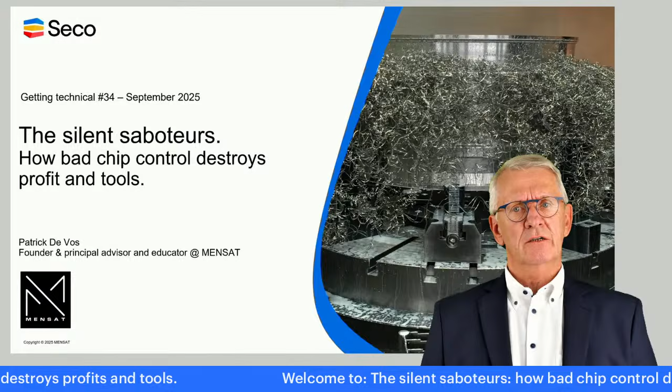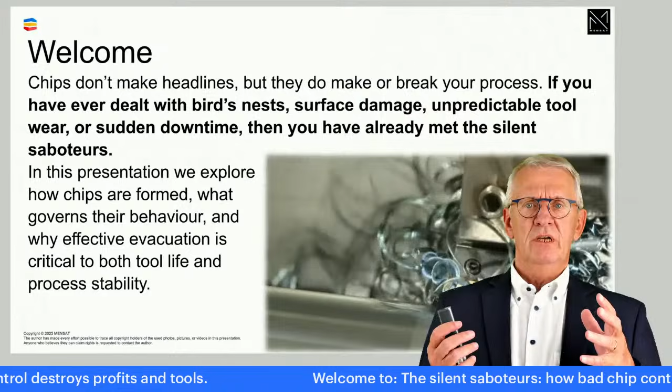Hello everybody, welcome to this session where we are going to talk about chips. People working in machining applications are well aware of chips—it's one of the things created during a machining process. Most of the time, when you use the word chips, everybody starts thinking of a situation like the one you see here on the video. In other words, chips equal problems.

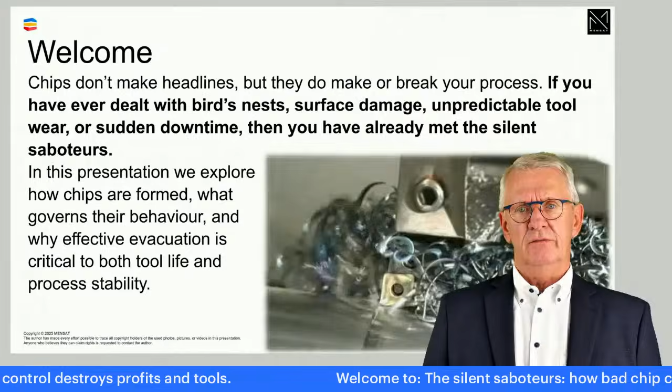That's in general how people see the aspect of chips in machining. In this presentation, I'm going to try to let you understand the other side of a chip. Sometimes I say chips mean trouble—for the careless, those who do not know. But for those who fully know what a chip is, a chip is a treasure, a treasure with which you can do a lot.

My name is Patrick de Vos, I'm your host today. I have more than 40 years in machining, so I've collected quite a big amount of insights. Over the years, I kind of created my own model or concept, one could say, about the machining process.

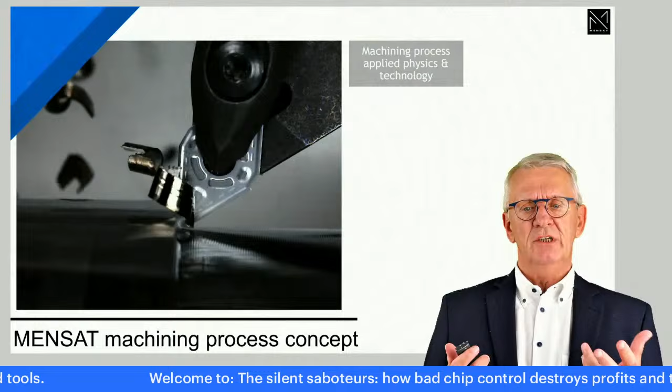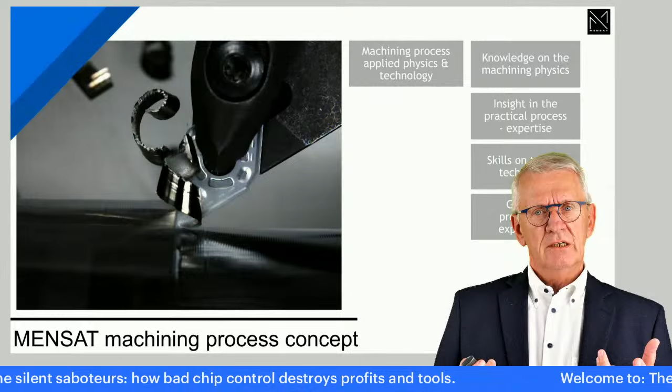One part of that concept is that understanding a machining process for me means you need a collection of knowledge on the physics side of machining—what's going on there, cutting forces, heat, temperature, all of that. You also have to have insight into the practical side, what we call expertise. Expertise, as I see it, is: okay, I understand now what's going on, and I use that knowledge to influence the process. That for me is expertise.

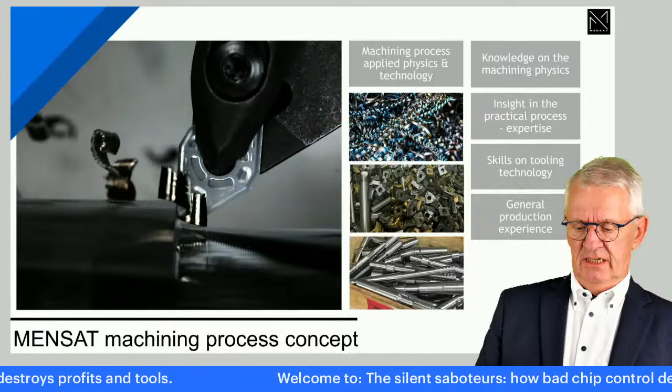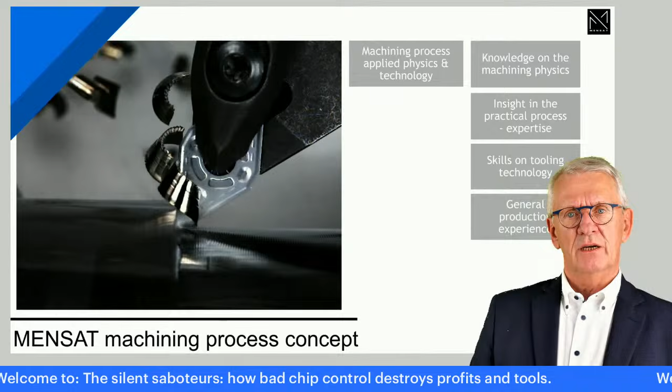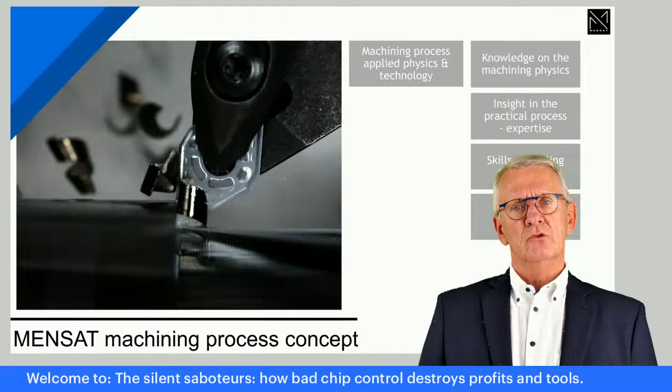You also need skills, and skills are about making it happen. You have the knowledge, you have the insight, you know what to do, and then you're capable of doing it—how do I manipulate all the elements in a machining process. And experience in production, because machining in the industry is more than a technique, more than a process. Machining is something people in industry use to create workpieces for an economical purpose, to sell them, to make profit out of them. That is also part of machining in my eyes.

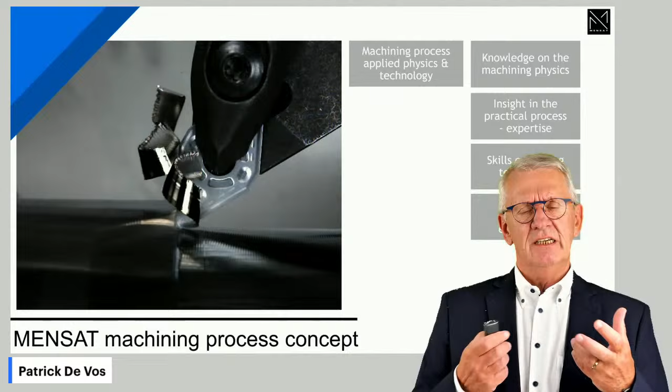But even if you possess all this knowledge, skill and insight, we notice that machining means chips are generated, used tools are generated, and every single chip which is formed is different, and every used cutting edge looks different. If you think about it, if you have a process and everything is fixed, why isn't every chip the same? Why isn't every used cutting edge the same?

And the third part, which is a reality, is that some of the parts we produce are no good. So you have a process, you establish all the process parameters, you make a workpiece—one is good, the next one is not good. That leads me to the conclusion that in machining today there's quite a lot of chaos. Chaos, as I define it: I have a number of parameters which I do not change, I make them work together, I look at the output, and the output is not constant, it's modified. This means there are things we forget, overlook, or wrongly estimate.

And the one we are going to talk about today is the chips.

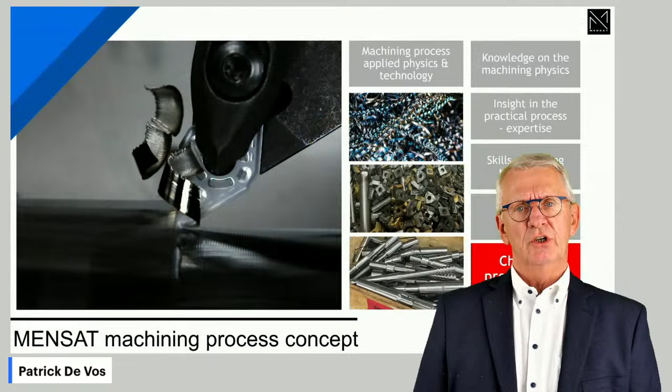Some of you have perhaps heard me talking about something I call GTDA, a methodology, a concept to analyze used tools. GTDA stands for Global Tool Deterioration Analysis, a method that gives insight into the practical machining process—not part by part, but the total picture, the total workshop, one could say.

Based on that insight, I can appreciate the actual machining process—to which level I have it under control, and where I need to optimize, improve, or correct. But GTDA has a disadvantage: it's measuring offline. It's measuring how a tool looks after the process, meaning whatever we see, whatever we learn from it, is late for the process which just finished.

That's not a big problem if you talk about big batches, where you produce thousands, tens of thousands, perhaps even hundreds of thousands of workpieces—what you learn from the first one, you can apply to all the others. But if you talk about small batch production, where perhaps you produce only one workpiece, you learn after that one workpiece why it was not good, but it's kind of too late. The other thing, which is what we are going to talk about today, is that you can analyze the chips.

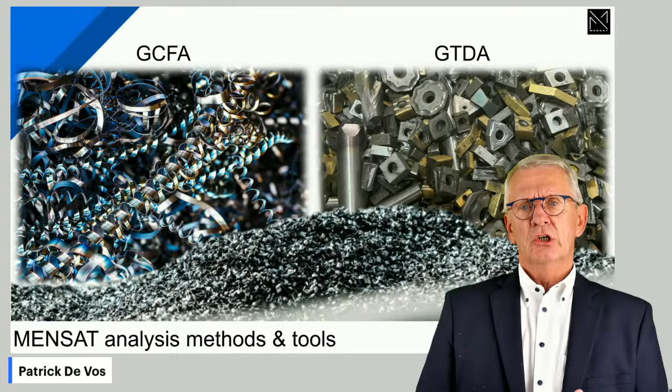A chip, next to problems and issues, is also kind of a signal to us, if you know how to pick it up - a signal online, in process, that tells you how the process is going. So in process, you can correct if needed, depending on what the chip is telling you.

All of these aspects on chip formation - I would like to refer to them, because we have only one hour today, we can't discuss everything. Although, if you have questions, please put them in the comments. At the end we have a question and answer session. I'd also like to point out that there are pocket guides available, and one of them is dedicated to chip formation - 80 pages of knowledge about chips, where you can find a lot more.

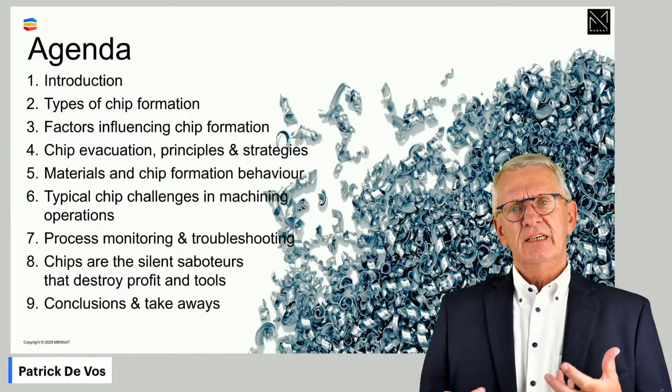The agenda for today: the time is limited again, so I want to talk a little bit about chip formation - how is a chip formed, and what are the different types of chips? I also want to talk about chip evacuation, because it's not only enough to control how a chip is formed, we also have to be in charge of how the chip evacuates away from the process, because a lot of issues can happen there too. We'll discuss elements influencing chip formation and chip evacuation. And the last part I want to talk about is the GCFA system - how do I monitor chip formation in process, and how do I act and react with all that?

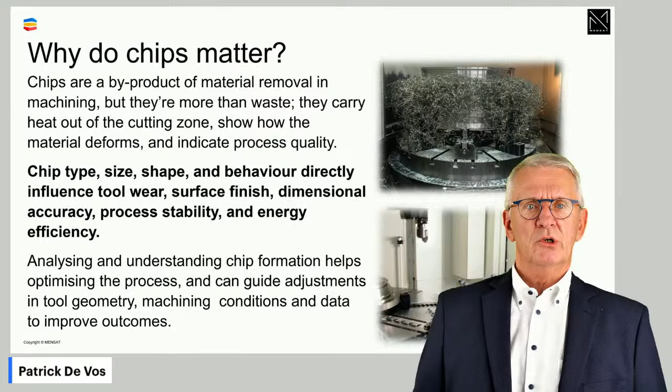If we talk about chips, what we need to discuss is the type of chip - is it a long chip, a short chip, whatever. The size, as I already said, how big is it. The shape it has, and how is the behavior of the chip. Because these things are going to influence how tools wear out, the surface finish on a workpiece, dimensional accuracy, process stability, and so on and so forth.

And if we evaluate chips, instantly we talk about good and bad. What is a good chip? What is a bad chip? In defining that, normally people look at technological aspects. They talk about a good chip making the process smooth and reliable, having a good heat balance, tool life well under control, and a number of other technical things people use to look at the chip and say, okay, this is good, this is not so good.

But next to that - because as I already said, machining is more than just a production process, in industry it's also a process we use to generate profit - there are economical and sustainability targets also. And if I take those two and look at a chip, a good chip should also not create hidden costs. What do I call a hidden cost? If a chip is too long and wraps around the workpiece, and the operator has to stop the machine and remove the chip manually, that creates a hidden cost - because everybody thought the machine was running, but actually it was not, because the operator had to remove the chip.

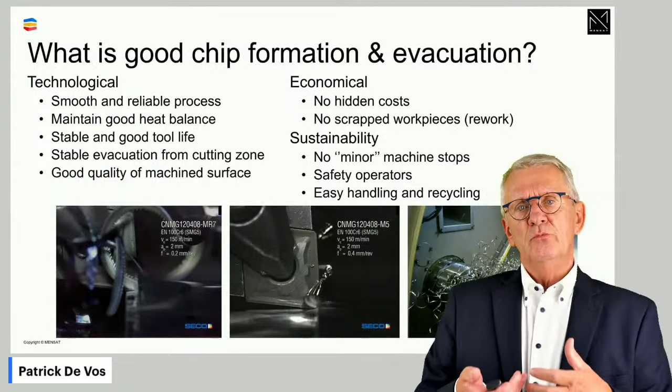Scrapped workpieces can have a hidden cost, and workpieces can be scrapped or at least need rework due to chip formation issues, chips that scratch the surface or something like that. And from a sustainability perspective, there should be no minor machine stops due to chip formation, because that's going to endanger the flow of the process and the safety of operators, since bad chips are not so nice for operators. But also from a recyclability perspective, chips should be easy to recycle and easy to be handled. So the definition of a good chip goes beyond pure technical stuff.

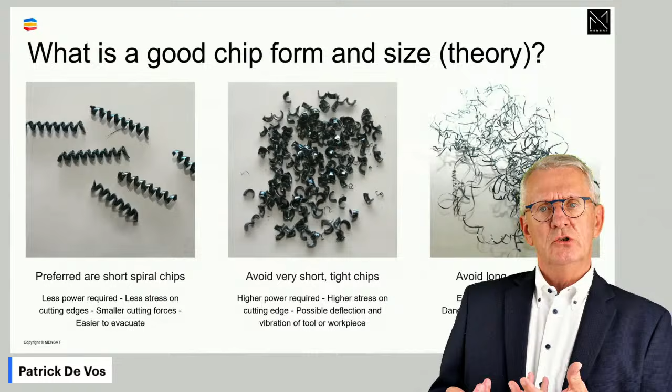If we look at chips in reality, in a workshop, normally we say the chips to the left, the spiral-shaped chips, are the good ones. They combine quite a lot of advantages and have very little disadvantages. Compared to that, chips can be too short or too long. Too short chips are mostly dangerous for the process because you'll suffer micro vibrations, which could lead to premature end of tool life. So too short chips is more a process-related thing. Too long chips is more a chip evacuation thing. The chips themselves are nicely formed, but it's an issue taking them away from the process.

Compared to that, chips can be too short — the so-called overbroken chips — which is dangerous for the process. Chips can be too long, whatever shape, and that is more a chip evacuation issue we have to handle.

Now, if you stand there looking at the process and you see the chips changing while you are machining, that's a signal — remember my chaos thing. If a chip changes form during the process, it means something has changed, and you should be observant, because it could turn out that it's a good thing, or it could turn out that it creates an insecure, unreliable situation. And then you have to stop, because otherwise you end up in problematic situations.

If you are confronted with long chips that become problematic, think in terms of using chip breakers, different chip breakers. You should increase the feeds. You can work with cooling — high pressure cooling could add that little extra thing to make a chip shorter.

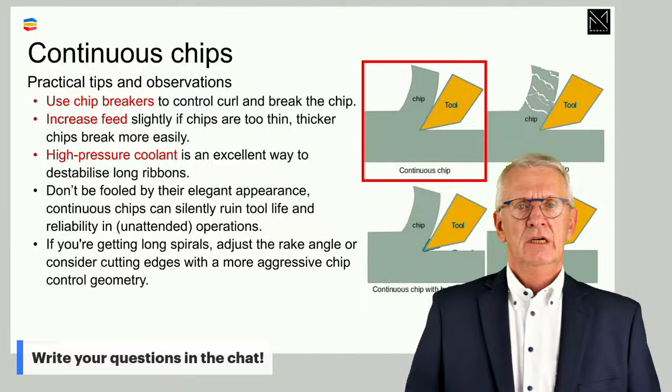Another type of chip, the opposite of a long chip, is a discontinuous chip — the very, very short chips, which you find in materials with low ductility: cast irons, for instance, bronze, hard plastics. That's where you find this type of chip. Here you have a bit of the opposite situation as the long chips — the chips are easy to evacuate, unless you end up with dust chips, then you have some other issues to take care of. But anyway, in general, easy to evacuate.

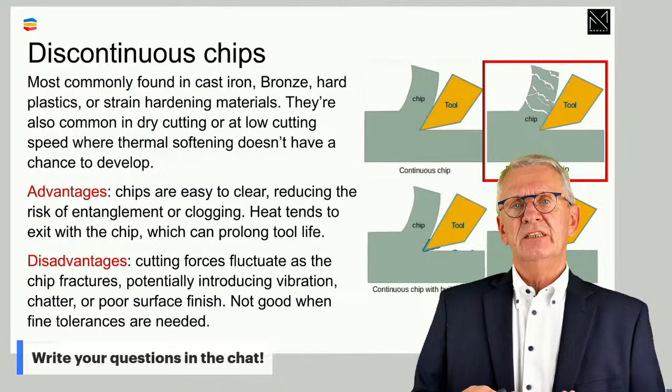For the process itself, it creates a constant change in cutting forces, pressure, and that type of things. And it's a challenge for the process, this type of chips. On top of it, mostly this low ductility is very often combined in those materials with a high abrasiveness towards cutting edges.

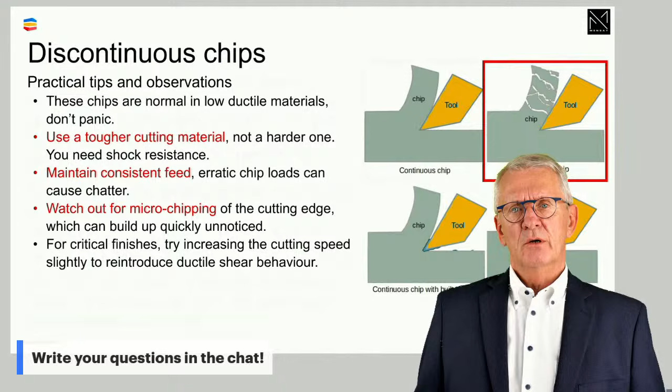So there we have those things to take care of. If this is really on a problematic level, use tougher cutting materials. That's a kind of a diplomatic thing, you make the cutting edge more adapted to handle this situation. Also here, bigger feeds, or at least consistent feeds, is what you should chase for. And on a cutting edge, be careful with micro chipping from a wear perspective, because that will be an important phenomenon here.

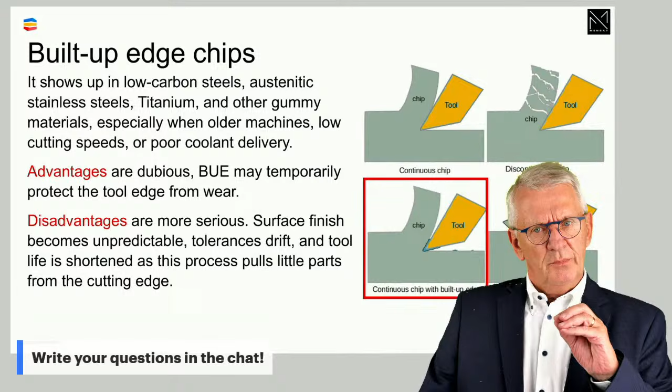Then you have what I call the built-up edge chips. Some materials show a tendency to connect to the cutting edge, to the tool. And if that happens, the chip which is formed is influenced by that. It's a very irregular, randomly formed chip. Very typical, a chip that comes with another issue you have during machining, namely that the built-up edge is formed. Advantages are hard to find. In theory one could say, yeah, but if such a built-up edge is formed, it kind of protects your cutting edge. It's a very nice statement, but in reality it's not so easy.

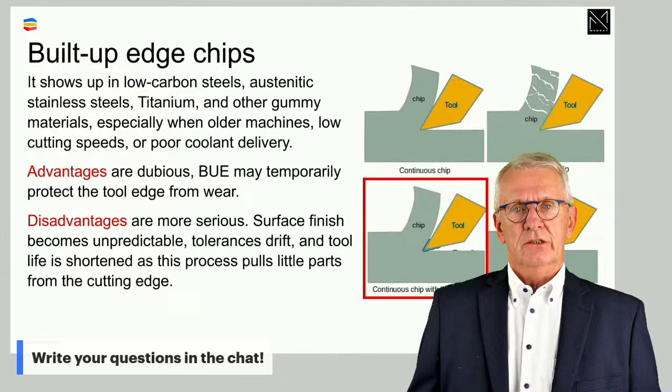The disadvantages are more serious. If you have a built-up edge phenomenon during machining, the chips which are formed are totally randomly formed. It's impossible to control them because they change every second. If you have this situation, increase the cutting speed, use sharper tools. Cooling system is the other thing to look into here.

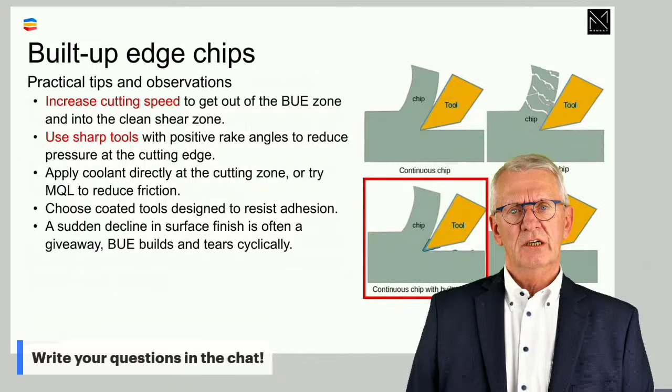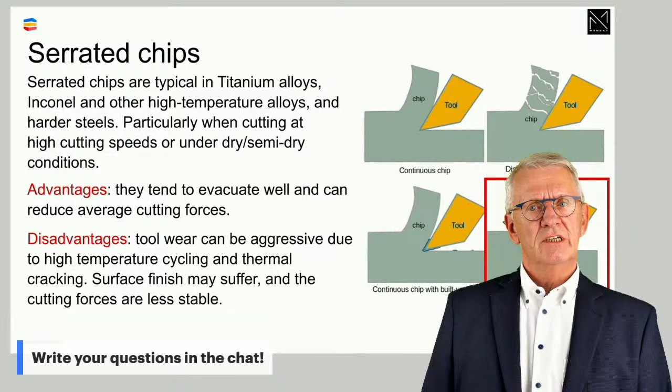In general, they have lower cutting forces when they are formed, which is a good thing for the smoothness of the process. But the disadvantage is that these are rather aggressive chips for the cutting edge, and they will influence tool wear and tool life seriously, mostly in a negative way. If you have this type of chips, the serrated chips, and if you judge them being problematic, it's about feeds, higher feeds, lower engagement zones, try to reduce the interrupted load situation on a cutting edge, and so on.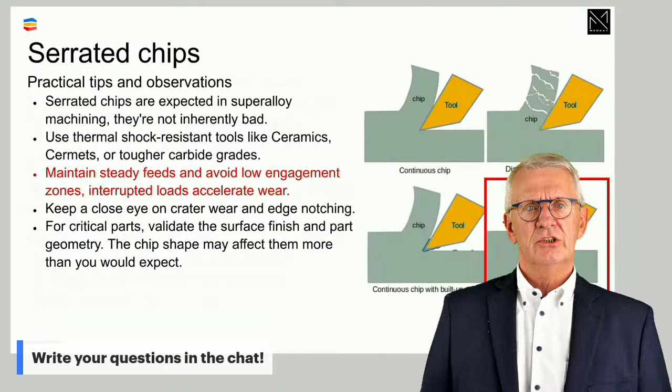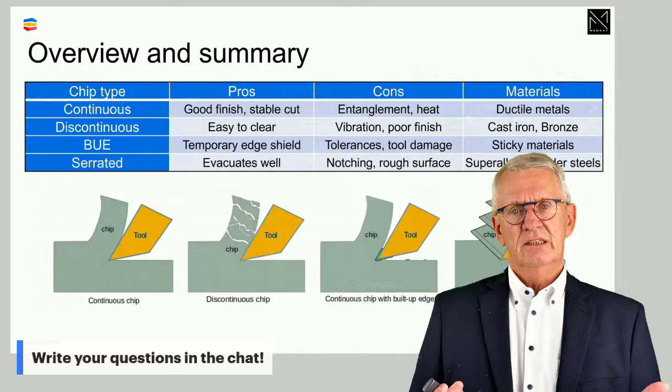This is very short, again we have a time limitation here. Very short, but again, if you think of reference materials available, you find much more information about these four types of chips. But from an evaluation perspective, these four chips come from typical workpiece materials. You have to accept that, and each of these four types of chips has advantages, although for a built-up edge chip it's doubtful to talk about advantages, I would say. And they have disadvantages, and it's a balancing exercise you have to do here.

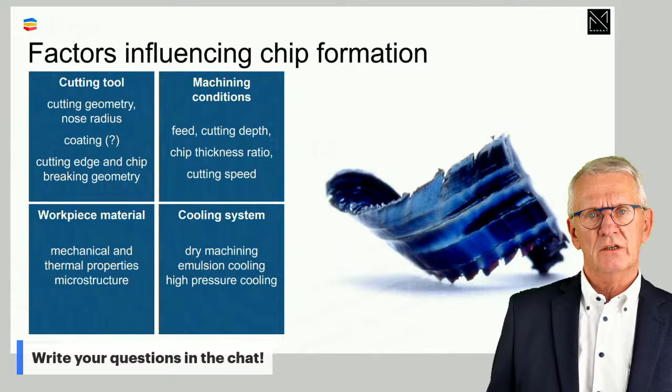That balancing exercise has a number of elements you can play with: elements related to the cutting tool, elements related to the machining conditions, elements related to the workpiece materials, and elements related to the cooling system you use. Now, if we think of workpiece materials, most of you are familiar with the so-called ISO system to classify workpiece materials in six families, six different groups. And one could say for each of these groups, it's kind of possible to connect a very typical chip formation process to it.

Steel, very typically, gives long, medium-sized chips, while cast iron gives us the short chips, the discontinuously formed chips. Workpiece material is an important element in the process.

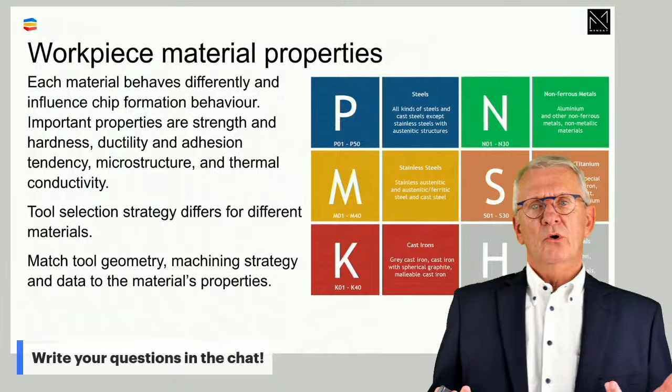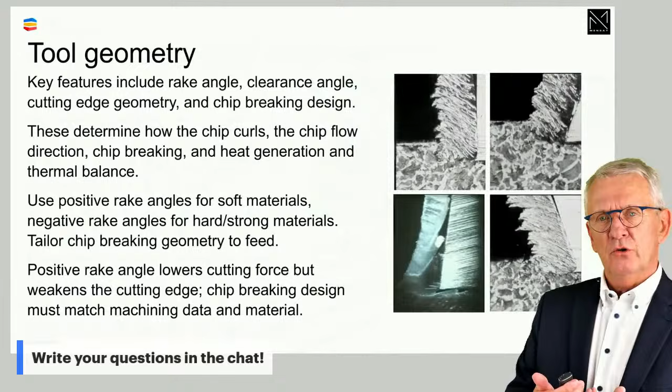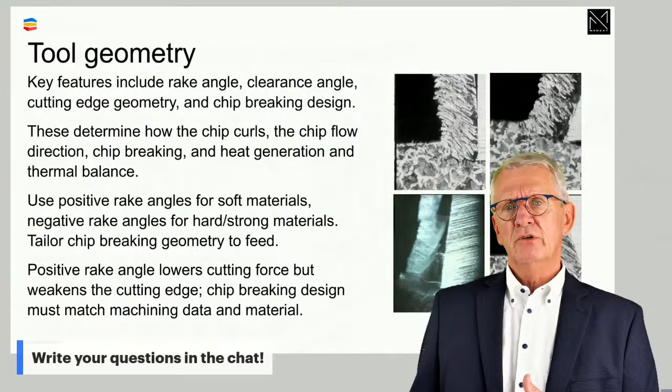Tool geometry, I let the video talk for itself. If you change the geometry of a cutting tool, the chip formation process itself is changed. And when the process that forms the chip is changed, the result of it, the chip, is also different. When we talk about tool geometries, it's the macro geometry, the cutting angles, the rake angles, and that type of stuff. But it's also the micro geometry, how a cutting edge looks. Is it sharp? Does it have a chamfer? All that type of stuff.

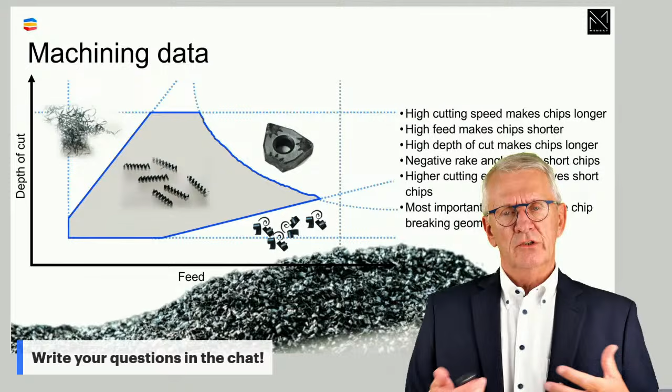It means the material is the leader in this thing - typical material, typical chip formation process. Influencing it is something you do by your geometry selection for the cutting tool, and how you combine cutting conditions with the selected tool. There you bring it all together. I'm missing one here.

A very important one which is always forgotten, but I'm going to take that in a few minutes from now. In the meantime, what do you think? Which element here is missing if we talk about chip control? Put it in the comment, I'm very interested to see what you think is missing here.

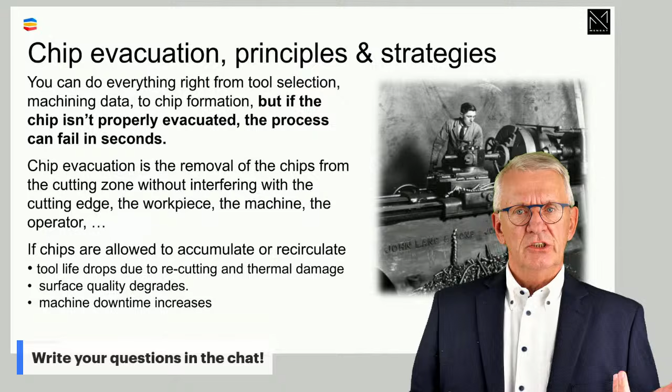Chip evacuation - once the chip is formed, it needs to be evacuated. Because if a chip is not evacuated, perhaps it's less dangerous for the process, but for sure for the operator it's a dangerous thing, and it's going to lead to machine standstill because the operator manually needs to interfere to evacuate the chips out of the cutting zone. If you don't control chip evacuation fully, it also will lead to potential damages on the workpiece and on the tool. Think of drilling operations where you don't manage to evacuate the chips out of the hole.

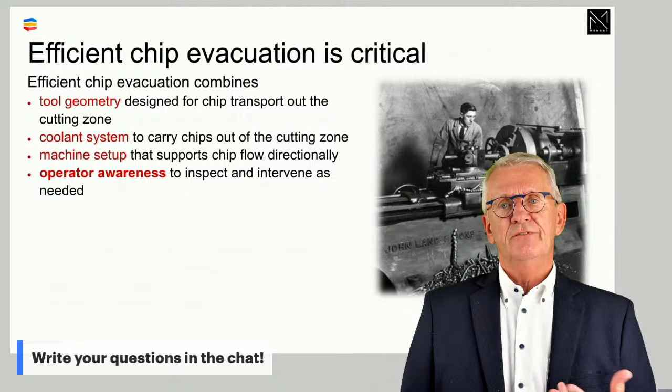For chip evacuation, the tool geometry plays a role, the cooling system you use plays a role, the machine setup you have plays a role, and the awareness of the operator - that yes, he must do something. Because with long chips which are not evacuated, very often an operator says, yeah, that's the game, it works like that. It's a kind of cultural blind spot. It's not the game - chips should be evacuated in an efficient way. Operators should not accept that.

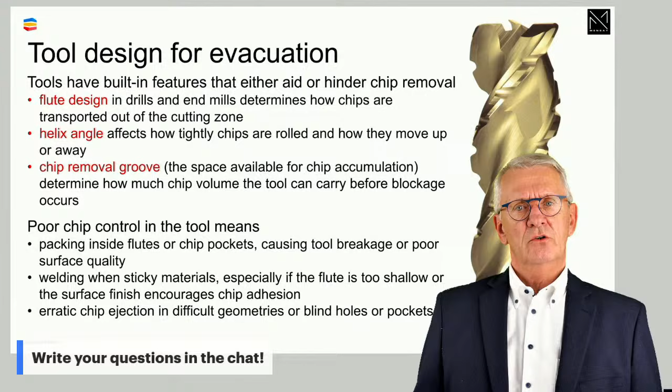Tool design plays a major role here, and I would say the flute design, the helix angle, and the chip removal grooves on a cutting tool - I'm talking here mainly on milling and drilling tools. Those are the tool design elements we play with to control how chips are evacuated. Because remember, if you don't evacuate chips in an efficient way, chips are going to hinder the process, are dangerous, lead to damaged workpieces, and so on. A correct tool design should take care of those things, making sure that the chip, whatever form it has, is evacuated in the most easy, smooth possible way away from cutting edges.

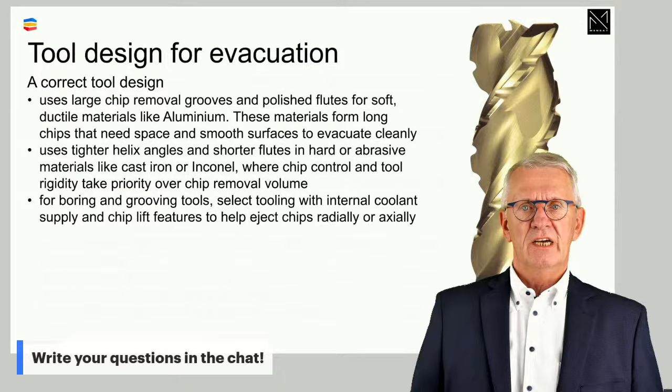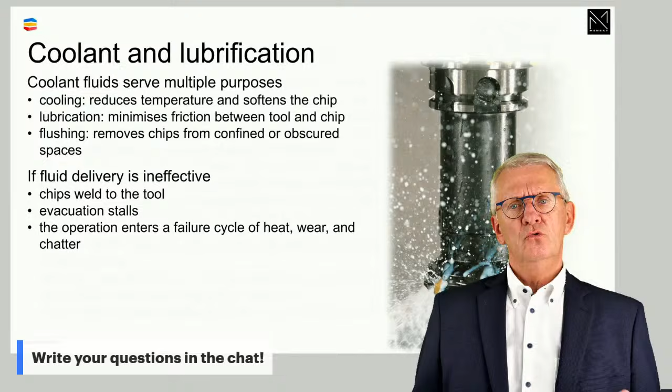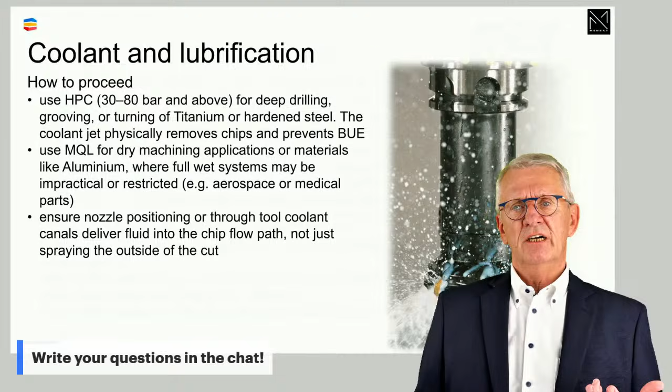Cooling plays a role here, because people use cooling to influence tool wear and tool life. People use cooling for lubrication, to keep temperatures lower, and so on. But cooling is also something we use to flush the chips away. And here I think especially of high pressure cooling systems, high pressure direct controlled pressure cooling systems, which are a very useful, helpful way to evacuate chips.

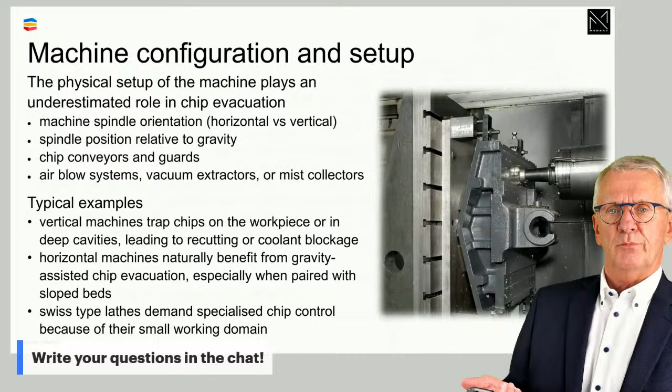Machine configuration - the vertical or horizontal machine - chips go away from the process and then fall down. So gravity makes sure the chips fall down, and depending on the design or configuration of a machine tool, that falling down is off the workpiece or into the workpiece. So it's a big difference.

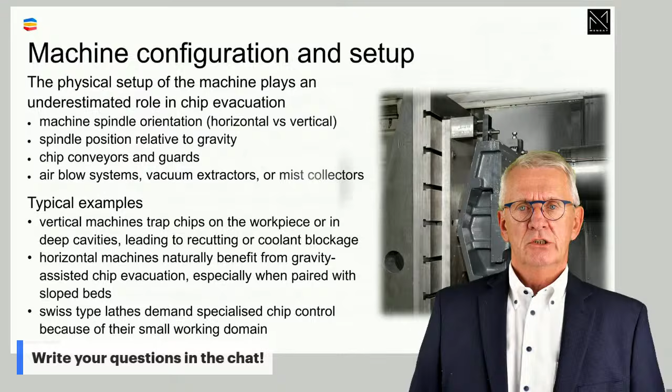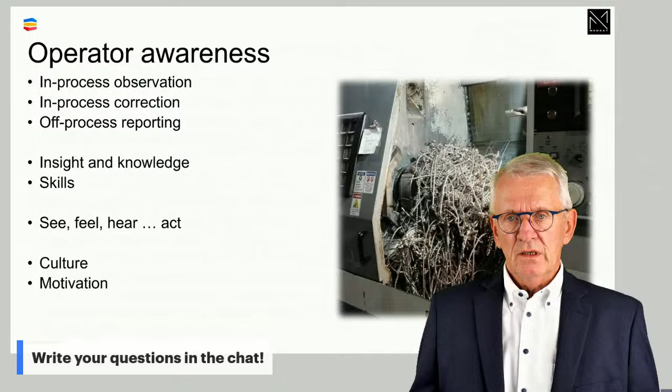And the operator awareness, as I already said, it's the operator today that has the clearest follow-up on what is happening with the chips. He sees them, he can feel them - careful with it - he hears them when they are formed, and he can act on it. So chip evacuation is a dynamic thing. It's not because it works 5 seconds good that you can rest assured it will go on forever like that. You constantly have to keep your eyes on it.

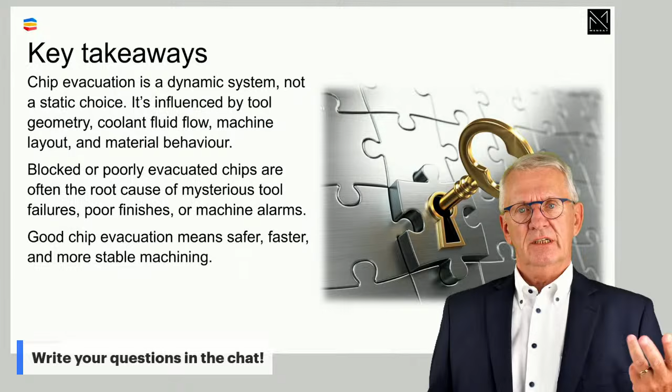And the result, or the negative result, if you fail to evacuate chips in the best possible way, is damaged workpieces, damaged operators, damaged machines, crashed tools, and so on, all leading to the machine having to stop.

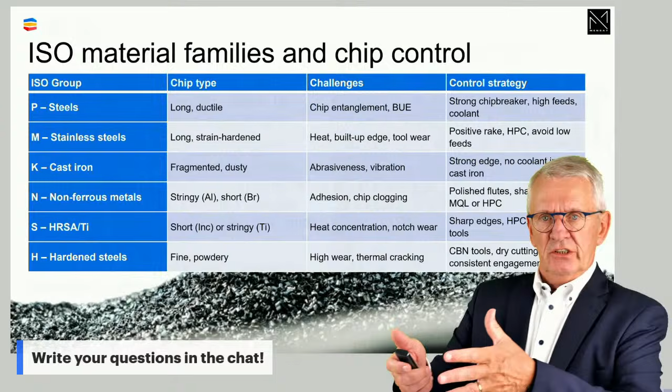Workpiece materials - every type of workpiece material, the ISO system leads to a certain type of chip. There's no use trying to change that, it's part of how a material is. And that type of chip gives you certain challenges, potentially, things you need to control and be aware of. You can't let it go out of hand. And there are methods, strategies to handle those chips. It's a very straightforward table - material, type of chip, challenges, and what to do if the challenge turns out to be a real problem.

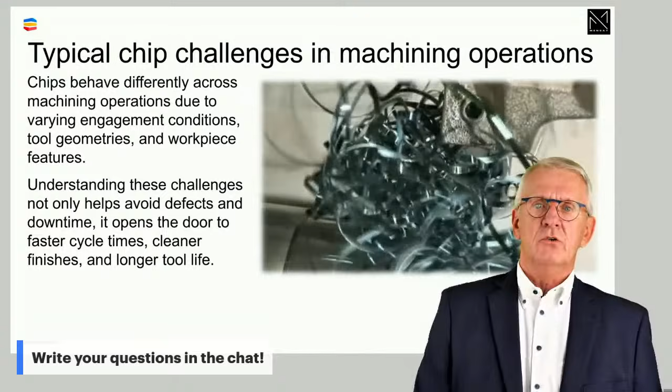And the fourth element I was talking about is the operation, because that's something people always overlook. Turning, milling, drilling, deep hole drilling, boring, whatever type of application - it's a different type of machining, and different types of machining lead to different types of chips. So it's not enough to say steel gives me long chips, because if you do turning in steel, or drilling in steel, or milling in steel, the types of chip will be different because the operation is different. That itself is a very large subject in the pocket guide, the technical guide I was referring to - I think it's a third of that little book, chip formation in different types of applications.

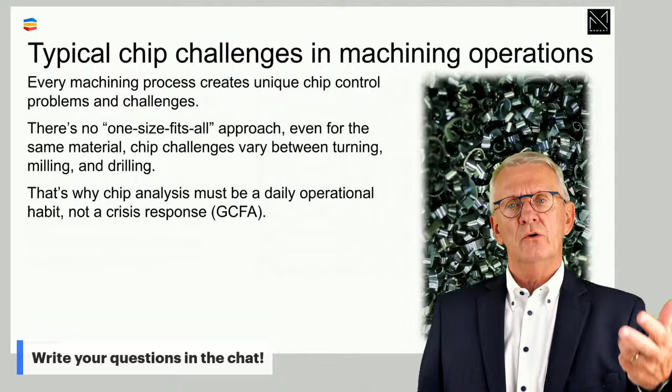It's important to make that difference. So if you evaluate chips, not only ask what is the material, what are the cutting conditions, what is the tool, but also what was the application - turning, milling, drilling, whatever. In that respect, if you have to handle chip problems: in turning, feed is the thing you can play with. In drilling, it's more the methodology - pecking during drilling is perhaps something you would love to play with. In boring applications, cooling is a key element, and milling is about exit.

If you ask me to put one critical element forward - we know how a chip is formed, we know the elements that influence chip formation, we know how to handle it if it gets out of hand, we know what to expect and what not to expect. We know that the workpiece material, the type of application, the tool geometry, and the cutting conditions which are used are four big chapters we can play with.

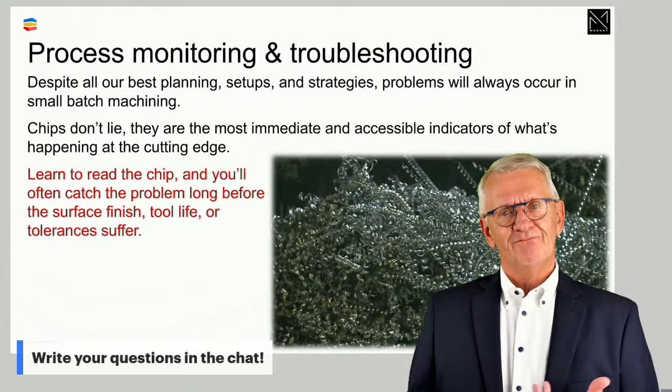If we go to the process now, and look at the chips while they are being formed, it starts with people actively observing chips. Very often, in my experience, if you stand at the machine and talk to the operator, he's very attentive for broken tools, very attentive for vibrations, carefully checking the quality of the workpiece after the operations, and keeps an eye on the cooling. But the chips - it's part of the game, as I already said a couple of minutes ago. So process monitoring, and doing troubleshooting based on that, starts with actively observing.

Actively observing the shape of the chip - is it spiral, comma shape, needle, ribbon, whatever type of shape? What are the dimensions - is it big, is it smaller? The colors. The color of a chip is an indication of the heat which was developed during the process, and to what extent the heat was evacuated away from the cutting zone or left in the cutting zone. So the color of a chip has a meaning, and most probably, if you carefully observe chip formation, you will see that colors of chips, as the tool goes on cutting, after a while will start changing.

So we can learn quite a lot from the color of a chip and the behavior of a chip. Is it flying away? Is it curling around the workpiece? Is it sticking on the cutting tool? All that type of thing is what we have to look for, because these things give us an indication of cutting temperature.

I have been defining a chip as a waste product, often giving trouble. I also have been defining chips as a signaler that tells you how things are going during the process. A third thing we should not forget is that a chip can help us a lot in machining, because machining means heat generation, and if the heat stays too concentrated in the cutting zone, that's problematic for the tool and for the workpiece. So we need to take the heat out of the cutting zone, and the most efficient way to take heat out is to put the heat in the chips, because the chips normally go away. So the temperature of a chip gives us an indication of how much heat is taken with the chip.

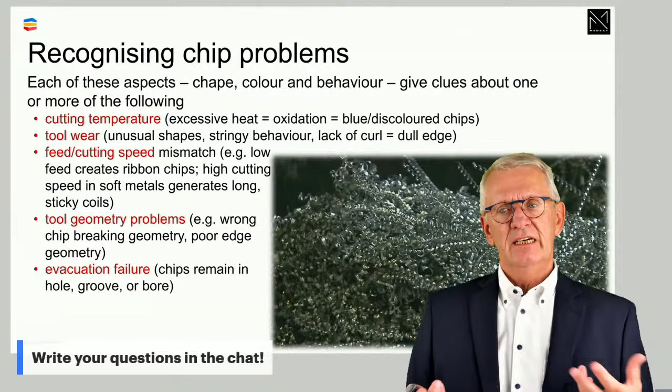There's quite a lot of things we can learn from observing chips, and I think there is huge potential into the future for digital help, let me put it like that - capture these things in a digital way through sensors, bring it into algorithm environments, but that is future. Today it's the operator who needs to observe.

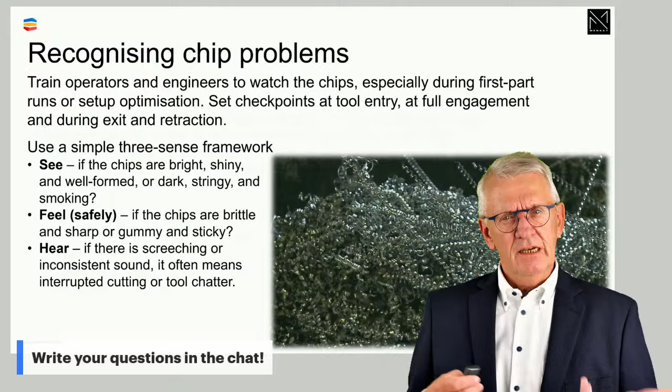He can see the chips as they are being formed. The operator can also, carefully, feel a chip - what is the shape, how big is it. There's so many things you can feel on a chip. And he hears the process, because different types of metal formation or deformation, which machining is, gives certain sounds, and how a material is deformed and to which type of chip it leads, you can hear the differences.

Then the long chips become problematic. So you should not see the chips here as a problem on its own. It's if that property is exaggerated, if long becomes longer, if short is getting shorter. You have to look at it like this.

If you have too long chips, the most probable cause is that the feed and the geometry combination - the geometry of the tool and the feed you use - there is a mismatch. You have to change both if you want to bring things under control again, or one of the two. So for instance, you could increase the feed, or you could use tools with a more appropriate chipbreaking geometry.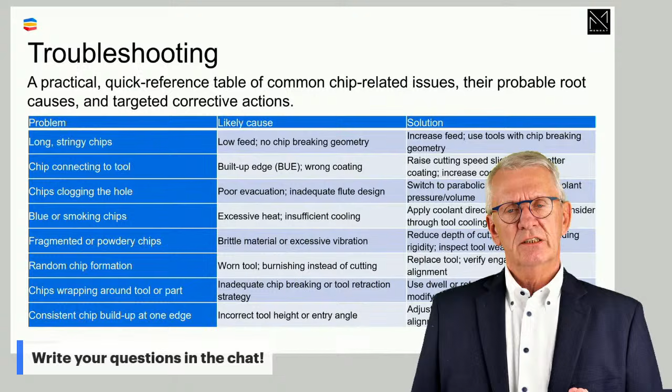And you see, here comes the expertise part, the experience part. It's not just knowledge - it's also insight and skill in handling chips.

If you do this type of exercise, if you want honestly to start working with chips - not in a way of 'they are problematic', but in a way of 'I need them to evacuate heat'. If I listen, if I look, if I feel carefully enough, they will give me a signal about the process. If you really start to do that in a systematic way, you should never treat a chip on its own.

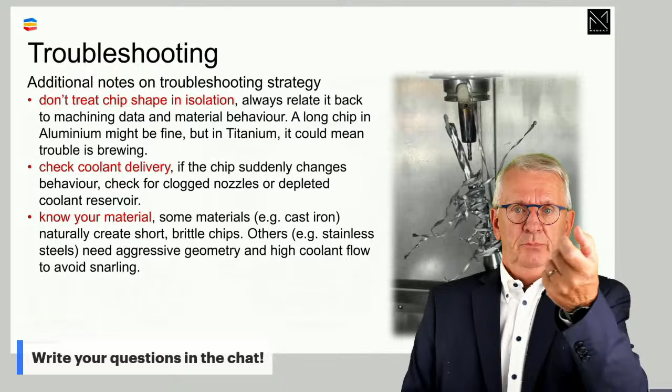Never. I have had that in the past - people come to me and show me a chip. 'What do you think?' I don't know. I see a little piece of metal in a certain shape called the chip. But evaluating if this was okay or not, I can only do if I know the environment in which this thing was formed - the application, the material, the cutting conditions.

So don't treat chip analysis in isolation. See the total picture. Always, if you do chip observations, check the cooling, because cooling is going to have an impact on how chips are formed - not numerically defined, but it's influencing - and especially how chips are evacuated. That's a very strong relation.

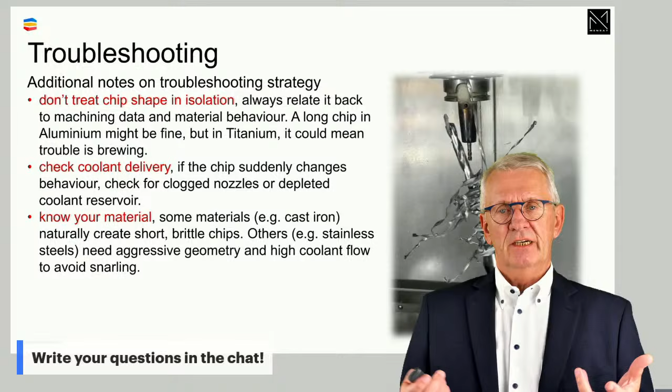Keep checking constantly, because you can rest assured if your cooling is no good, most probably your chips will tell you, and the chips will be no good either. And of course, if you do chip evaluation, know your material - cast iron gives short chips, and if you say 'Ooh, they are too short, I want to make them longer', well, I wish you good luck having long chips in cast iron. It's a big challenge. So know your material, know what to expect, but make sure that you control it - that the random aspect at least is taken out.

Observe chips while they are being formed. Is the chip breaking? Is the chip going away? Is the chip changing shape, color, or dimensions while cutting? Once the spindle is stopped, check again - where are the chips? Are they gone from the process, or are they hanging around somewhere? Are there signs that the chips influenced the machined surface? That is something you can only check the moment the spindle stops.

Once you have those two - chips during the process, and the results after the process - if what you see you don't like, try to figure out what was the main cause. And that's where you have to act. This is a kind of built-in feature in that global chip formation analysis - how to do the analysis.

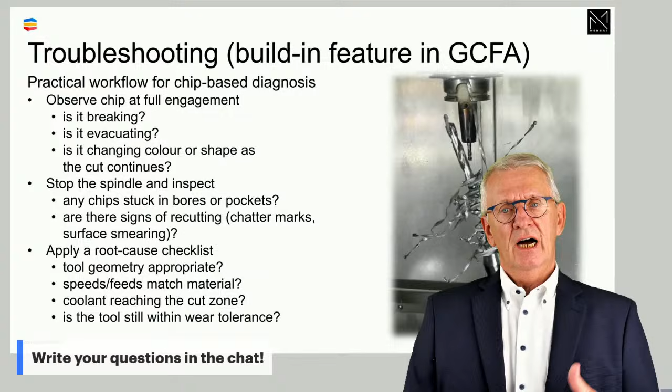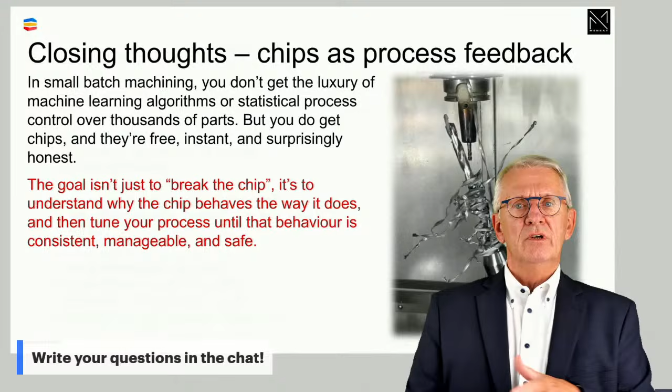Chips are process feedback. Chips are waste. Chips are a needed element in machining - think of heat that needs to be taken out. But chips are also signalers, they do process feedback. If you evaluate chips, it should not just be about solving a technical problem, breaking the chip. It should also be: what can I learn from the process I just had or am having? What can I do to improve? That is what we aim for.

Now the hidden cost aspect, which I already mentioned - chips really are hidden cost creators. Because if a tool breaks, that makes a lot of noise, everybody in the workshop hears that something is wrong. But chips do not. And if there are negative things connected to the type of chips you have - the machine stopping, the operator needing to take out the chip, reduced tool life because chips are hurting the cutting edge, or deteriorating machined surface quality because chips are interfering - it's all going on quietly.

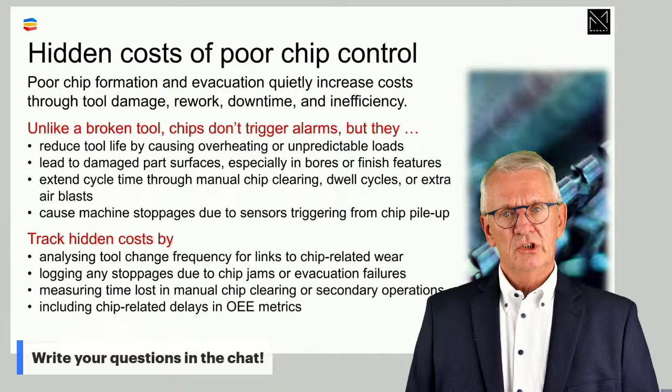The results are hidden till in the end you do the final analysis. So ask people in the workshop to keep an eye on it. If you notice that a machine is standing still regularly, check with the operator why. It's just a question, and perhaps it gives you an answer - because I have constantly long chips I need to remove. Simple, log that. Measure the lost time due to chip formation or evacuation issues.

Part quality is something that is underestimated. Next time we are going to talk about boring applications, and in boring applications more than in others, if you see certain quality issues on a workpiece, they go back directly to chip formation during the process. So if you have quality issues with finished workpieces, it could well be that they point to certain hidden chip formation or evacuation issues during the process.

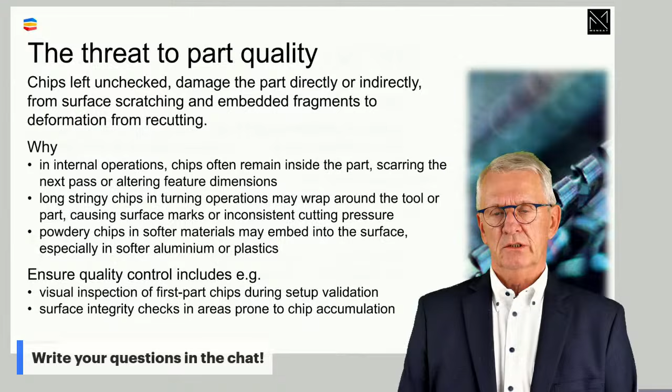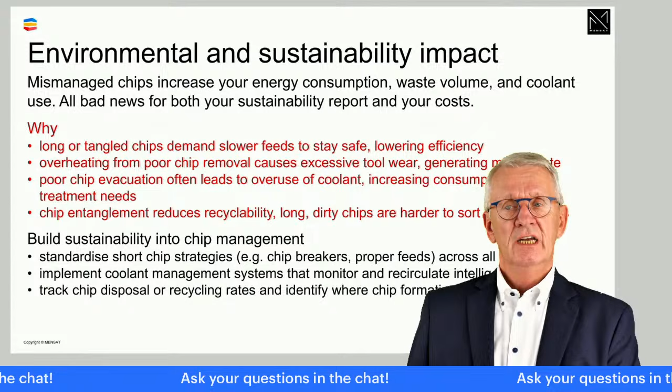Environmental sustainability - if chips create loss of efficiency, that is going to influence the durability of an operation. The recycling of the chips is influenced by how they are formed and evacuated. It's very clear that how chips are formed, and how they are evacuated away out of the cutting zone, influences these things.

Most important - I already said, in the past when I had talks about this with people in a workshop, I so often heard people say: yeah, but it's the game, it's how it works, we cannot do anything. Aluminium gives long chips.

And I think not accepting is where it all starts. There are types of chips, but an operator should still have an unhappy feeling about certain types of chips, and an ambition, a motivation to try to influence it. For me, that's a culture. I can give as much knowledge as you want about chips and how to influence them, but if that motivation, that mindset of wanting to improve is not there, then nothing happens.

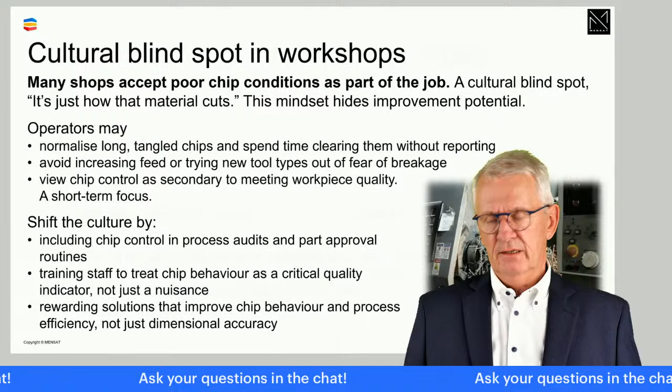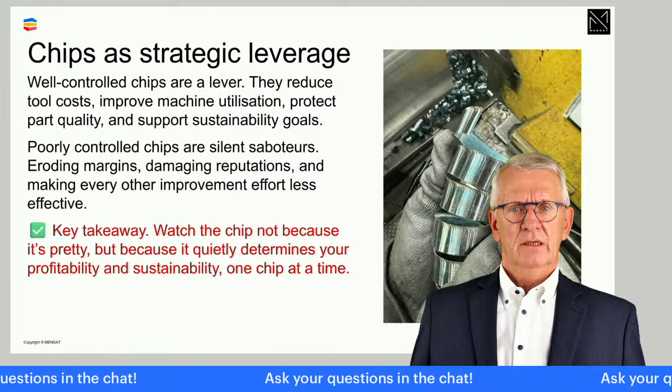Mindset change is a very critical element when you talk about chip formation and chip evacuation. Mostly people say it's waste, chips are waste, but chips are a lot more than that. If you handle chips in a correct way, they can give you some strategic leverage to improve things. Keep an eye on the chips - that is my message here.

If you have chip control in the best possible way, and if you manage to have your chips well evacuated out of the cutting zone, the advantages are multiple. In general you will notice you can take profit of longer tool life - if cutting edges are less damaged by certain types of chips, it gives you less wear per time unit, per finished workpiece, leading to longer tool life. Longer tool life leads to a lot of advantages - not just lower purchasing budgets for tools, but also fewer stops to change tools. It gives you improved, more consistent part quality.

If chips are constantly scratching on machine surfaces, if you constantly suffer from built-up edge problems, that is going to endanger the quality of a finished workpiece. If you have your chips under control and evacuate them well, you have a more stable process, which is very important if you want to scale up production to produce 10,000 workpieces in a stable, reliable manner, or if you need to handle variation more efficiently.

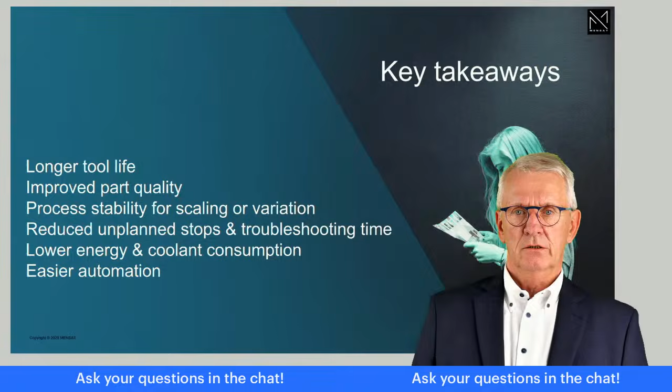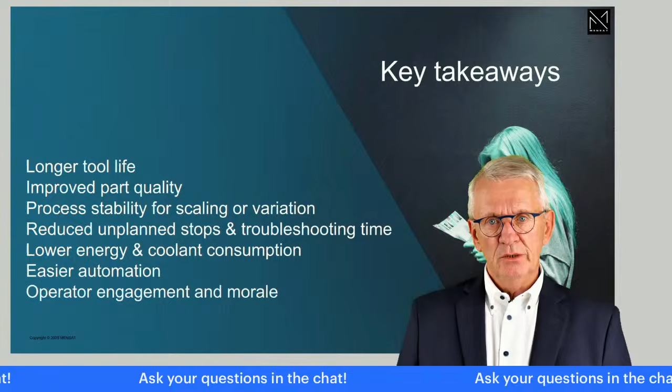And last but not least, operator engagement. Operator frustration and morale will improve, because those bloody chips always cause problems. I have to keep my eye on the time.